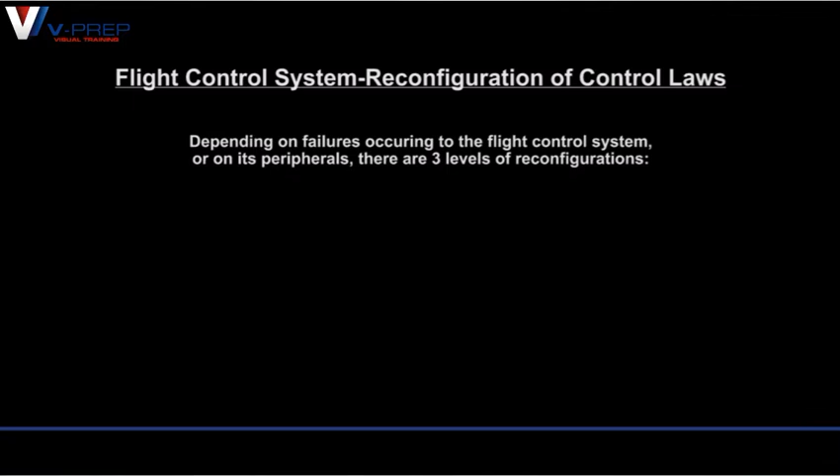A320. Alternate law. Flight control system reconfiguration of control laws. Depending on failures occurring to the flight control system or on its peripherals, there are three levels of reconfigurations.

Alternate law, direct law, mechanical backup.

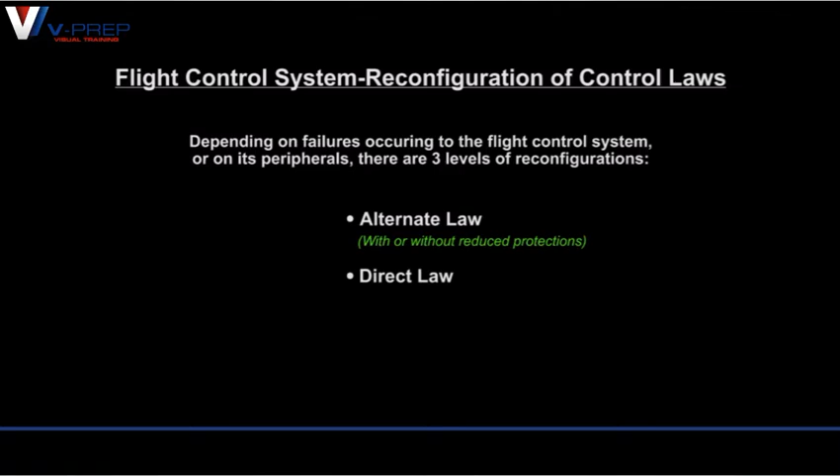Alternate law. In flight, amber X's replace the green double bars on the PFD, and an ECAM flight control alternate law indicates that the aircraft flight control laws have changed from normal to alternate law.

Alternate law can be with or without protections.

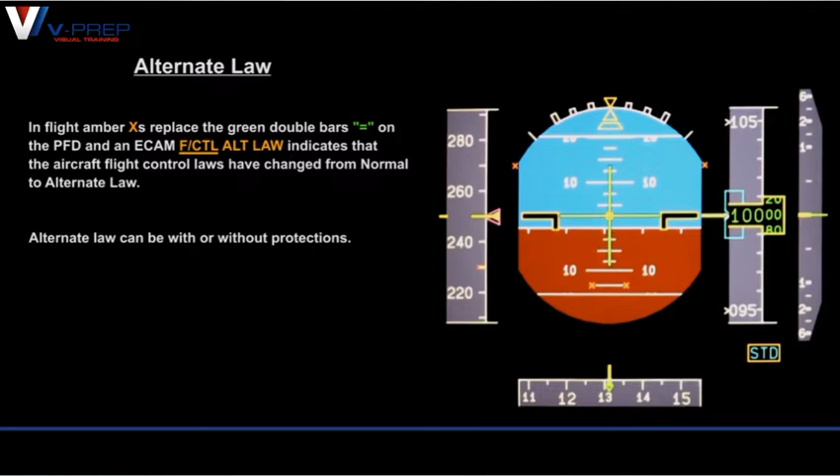Pitch control flight mode. In flight, the alternate law pitch mode follows a load factor demand law much as the normal law, with auto trimming in changes of speed or configuration, but has reduced protections. There is no pitch attitude protection.

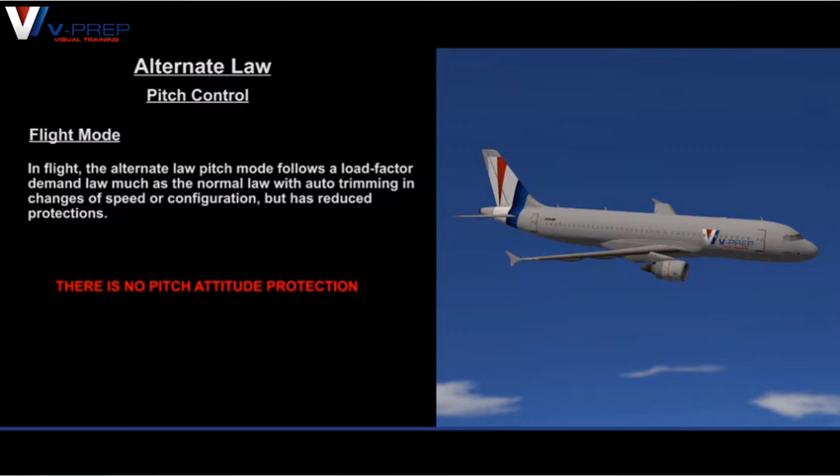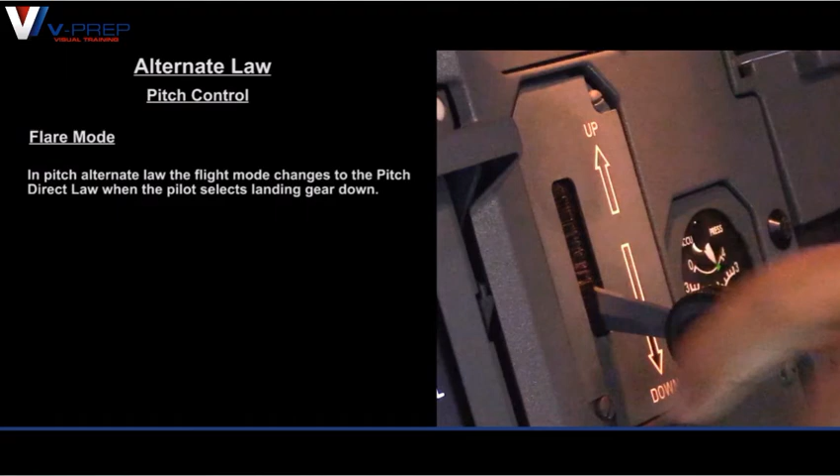Flare mode. In pitch alternate law, the flight mode changes to the pitch direct law when the pilot selects landing gear down. The flare mode is a direct stick-to-elevator relationship with manual trimming by the THS, direct law.

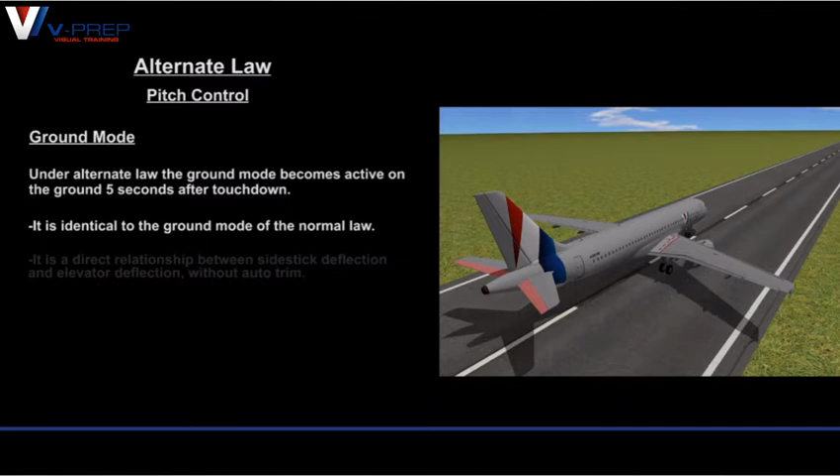Ground mode. Under alternate law, the ground mode becomes active on the ground 5 seconds after touchdown. It is identical to the ground mode of the normal law. It is a direct relationship between side stick deflection and elevator deflection without auto trim. It automatically sets the trimmable horizontal stabilizer at 0 degrees inside the green band.

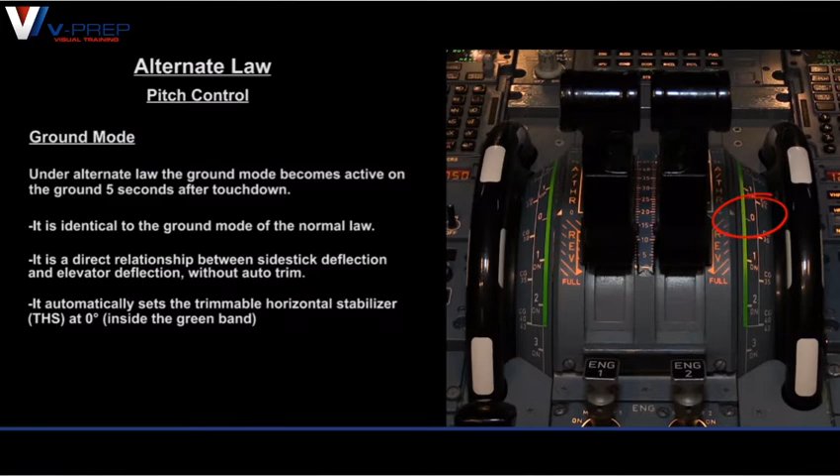Lateral control. When the aircraft is flying in pitch alternate law, lateral control follows roll direct law. It is a direct stick-to-control surface movement relationship using ailerons and spoilers 4 and 5.

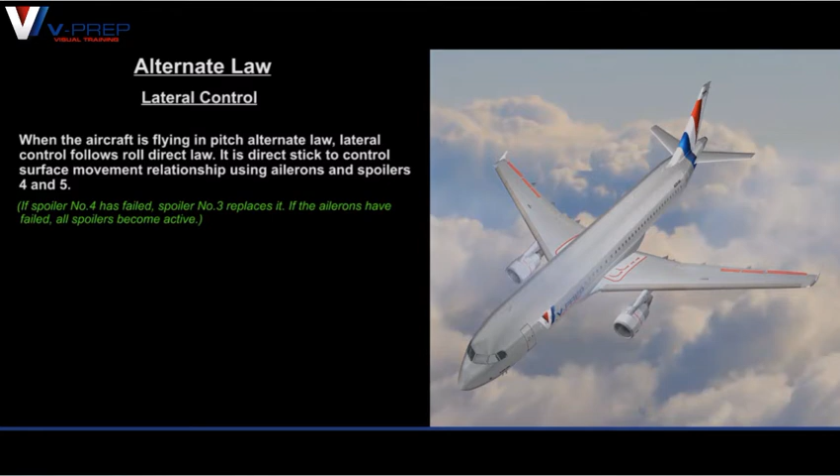Roll rate is automatically limited to about 30 degrees per second in clean configuration and 25 degrees per second when slats are extended. The rate of roll is higher than normal law, and the aircraft appears to be very sensitive at first. There is no bank angle protection.

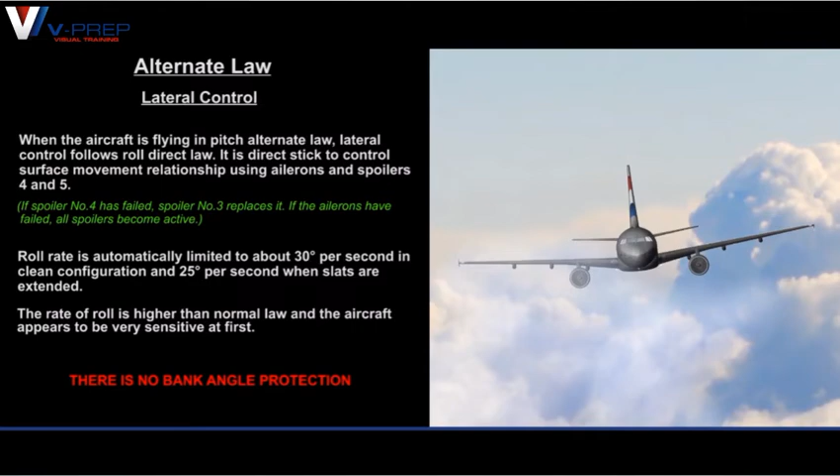Yaw alternate law. The turn coordination function is lost and the pilot controls yaw with the rudder pedals. Only the yaw damping function is available. Damper authority is limited to plus or minus 5 degrees of rudder deflection.

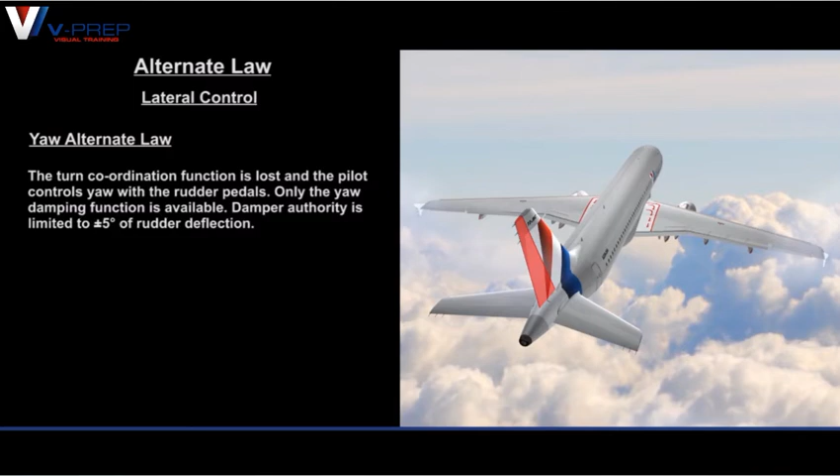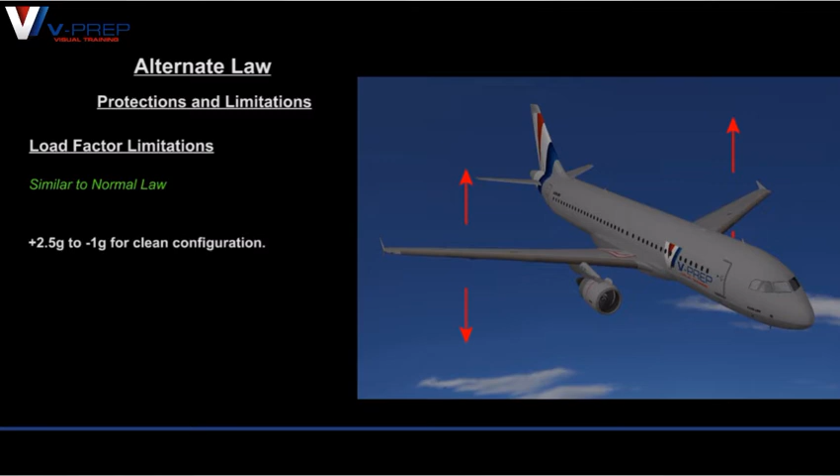Protections and limitations. Load factor limitations. Plus 2.5 G to minus 1 G for clean configuration. Plus 2 G to 0 for other configurations.

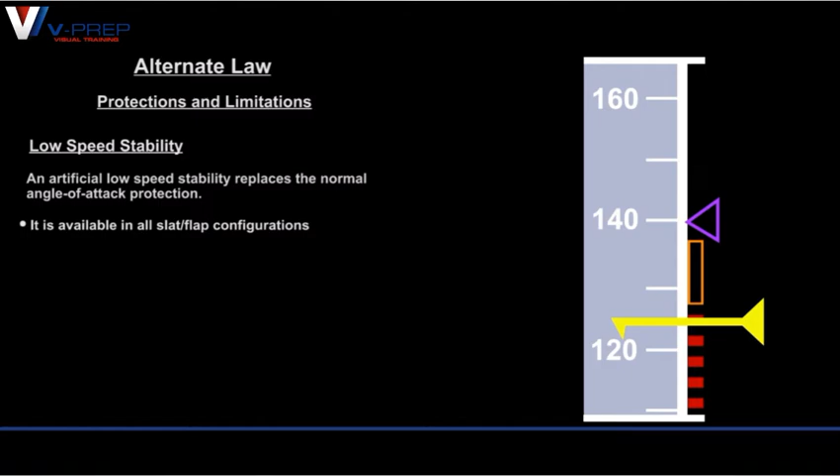Low speed stability. An artificial low speed stability replaces the normal angle of attack protection. It is available in all slat flap configurations, active from about 5 knots up to about 10 knots above stall warning speed.

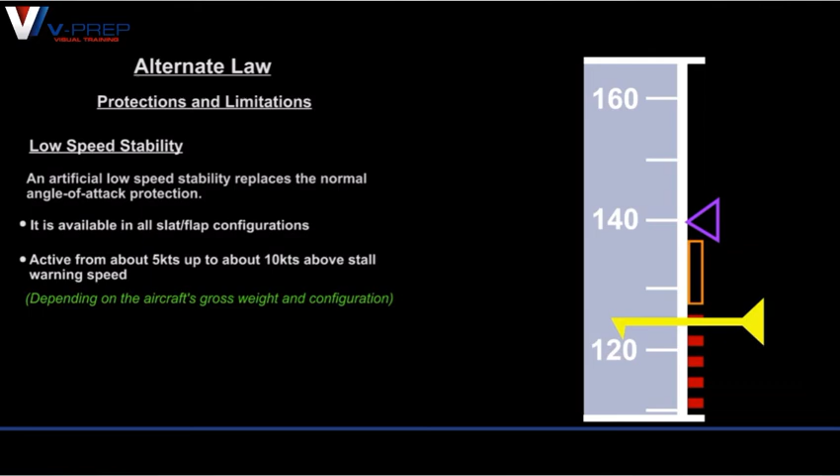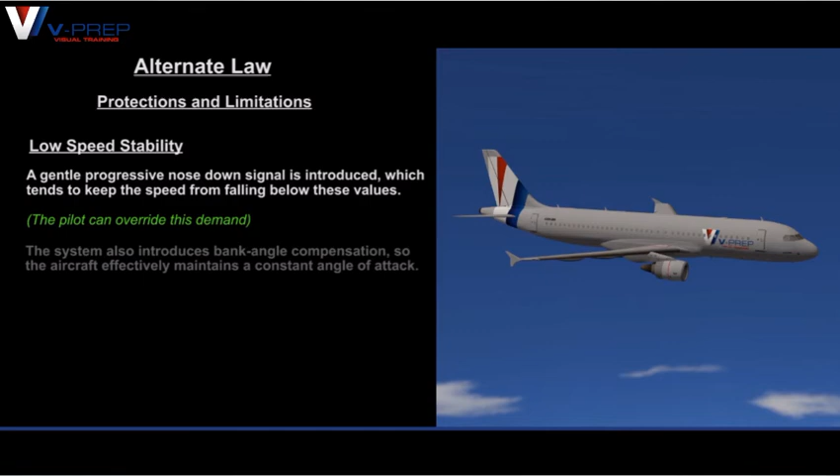A gentle progressive nose-down signal is introduced, which tends to keep the speed from falling below these values. The system also introduces bank angle compensation, so the aircraft effectively maintains a constant angle of attack.

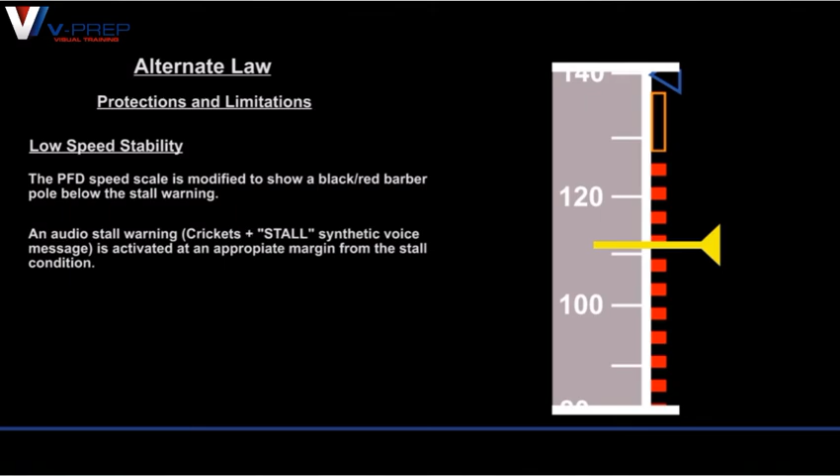The PFD speed scale is modified to show a black and red barber pole below the stall warning. An audio stall warning, stall, is activated at an appropriate margin from the stall condition. The alpha floor protection is inoperative.

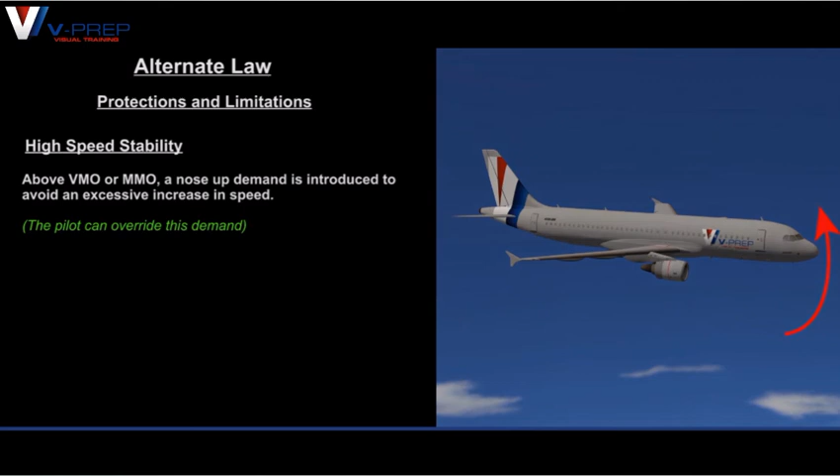High speed stability. Above VMO or MMO, a nose-up demand is introduced to avoid an excessive increase in speed. In addition, the aural overspeed warning, VMO plus 4 knots or MMO plus 0.006, remains available.

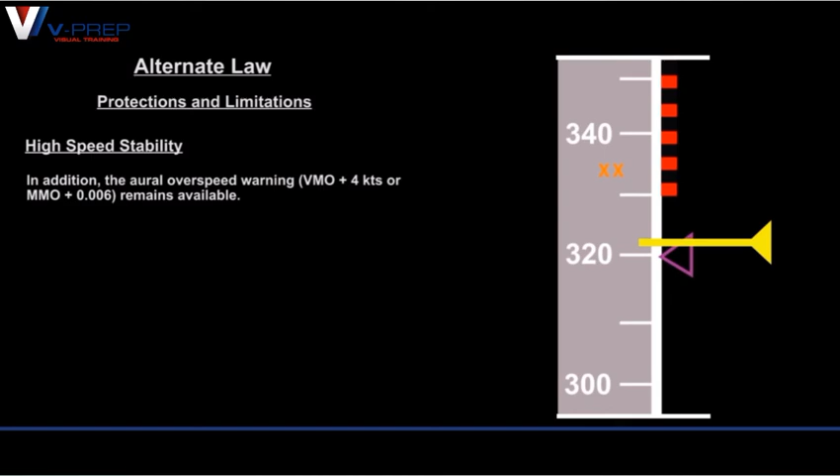Alternate law without protections. This is identical to alternate law except that it does not include the low speed stability or the high speed stability. It includes only the load factor limitation.